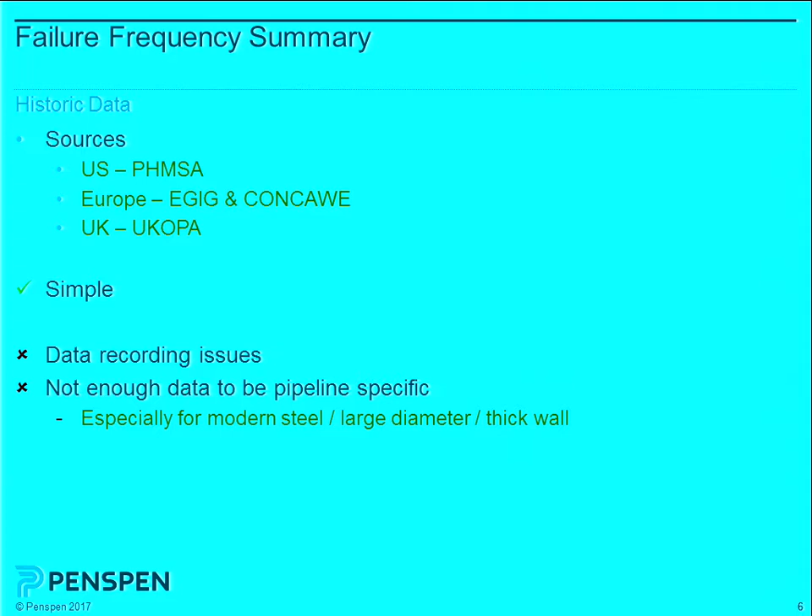Failure frequency: we've got historic data we can get from all sorts of databases. It's nice and simple, problems being not all the data is recorded, and if you want a specific value for a specific pipeline, good luck. Especially if you're looking at a new project. If you're in the design team of a new project and they want a risk assessment, when you go to the historic data, there will not be a pipeline that matches yours. And the answer then isn't that the failure frequency of your pipeline is going to be 0. If you're lucky, it'll be 0 on day 1.

Okay. But if we're not going to use historic data, we're going to predict. Luckily, UKOPA publish these summaries of the defect values that you can use. Incident rate, data from the UK. If you're somewhere that looks like the UK in the way it manages developments, i.e. not very much land and lots of people, so there are quite strict rules and you need permissions, then it works. If it's somewhere more like a banana republic, like America, where if you own the land you can do whatever you like, then you might want to think about probably getting more damage.

Failure: we talked last time about whether you've actually done these or not. Can't believe the pipeline engineering course doesn't cover these equations at some point. So NG-18 is for metal loss, so either corrosion or a pure gouge, and then the Hopkins-Cairns or the EPRG or the API 579 dent-gouge model, depending on which reference you pick up, but they're all the same model. Random variables: just use the defect dimensions, don't bother with the other stuff. You can do a full SRA if you want, it just takes longer. Need a bigger computer, and then you can solve it.

When I first started giving these lectures about 10 years ago, we used to recommend Monte Carlo simulation because this was hard. This is now a lot easier. Computers are better, so this is quite fast as well. If you do numerical integration, you get the same answer each time. If you do Monte Carlo simulation, you will trend to a stable answer, but you might need to do 10 million simulations to get there.

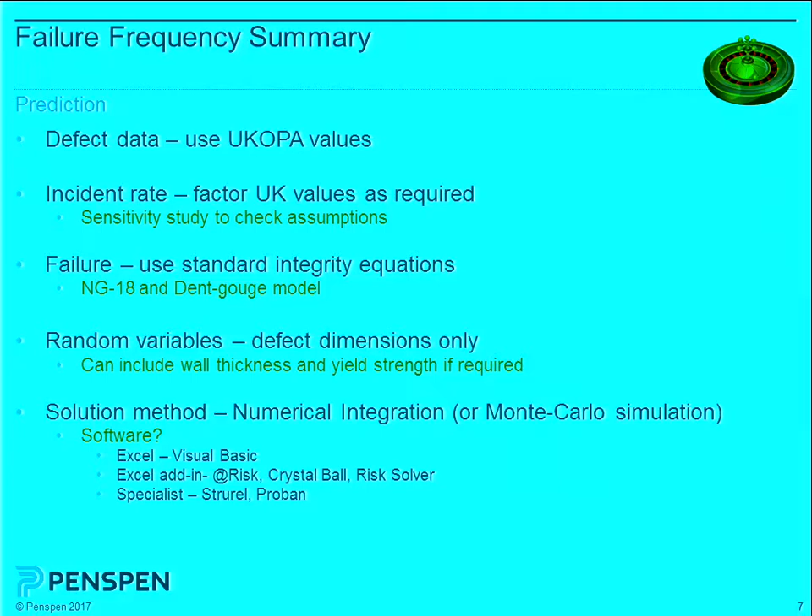So the more weird you get with these programs, the more all you're really doing is pushing pretty pictures for reports because nobody really believes it. Okay, so a little example. See if I can get this to work.

Okay, so we have here a little calculation, yeah? So we have a pipeline, yeah? 36 inch, 12.7, 75 bar, 5% underthickness. This is, from that upwards, the most common pipeline in the UK for the transmission system. The gas transmission system is pretty much mostly built to that standard.

Charpy energy, that's pretty low these days. You can get 300 joules now, but when these were built, that was the minimum in the API 5L spec. And when you're doing a risk assessment, most of the time you know very little about the actual pipeline. You haven't got the original material data, so we have a tendency to use the minimum value that was applicable at the time. The equations actually don't vary that much for Charpy, it's not that sensitive.

Area classification, so we're going to put something in. We've got depth of cover, standard UK depth of cover 1.1, no protection, and what we're going to get out is some things. So we've got some modification factors, so local modifier, this is just so we can fudge it, if we're doing it somewhere that's not the UK. Depth, 1.1 metres, so that's normalised to 1. Protection, there's no protection, so again it's normalised. When we put the area in, we get a value.

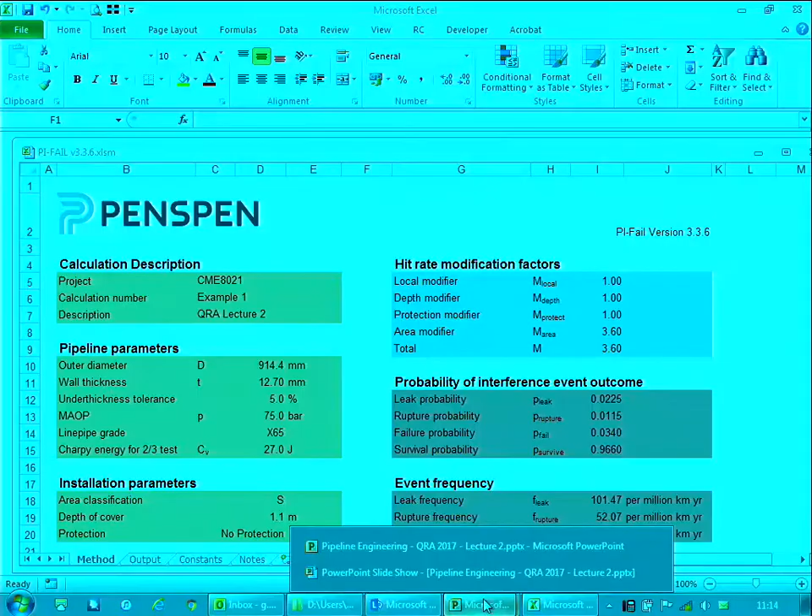And you get these results. So these, for the UK, we would use these in QRAs for the UK. If this was America, I might say, if this was a class 3, maybe we'll get twice as much damage because there's less planning permission. And once you own the land, you've kind of got a lot more freedom to do things.

Although they tend to now have a lot more one-call systems. So in theory, if you ring, you should get a response that says, no, don't dig there, there is a pipeline in that field. There are some one-call systems in the UK, but they don't cover everybody. Which then starts you to worry about whether it's better to have one or not, because does it give the construction contractor a false sense of security? If he rings the one-call system that exists in the UK and they say that it's fine, but it only covers 80% of the operators, well, what if you're in a field that's...

But hopefully the reason for coming on this course is you get to be the person who supervises the excavations, not the person who's doing the excavation. So anytime anyone digs a hole, stand back, just in case. It's always my advice.

Okay, so consequence assessment. So some simple models, quick rules of thumb, good for semi-quantitative risk assessment. We talked a little about the potential impact radius in the B31.8S equation, which is used in American legislation to define a high consequence area, which I call the big circle of death. It's a nice, simple way. But for a full QRA, I must update the clip art. Nobody has a computer that looks like that anymore. You've got complex models, you need to run them lots of times, you get a range of results if you use the literature.

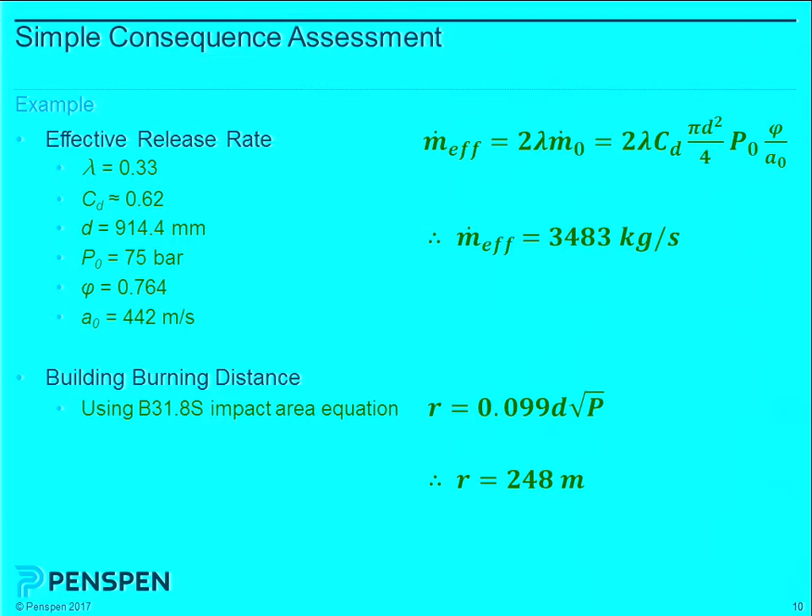Building burning distance from the B31.8S. So for that pipeline, when we're talking about 36-inch, 75 bar, we're talking 250 meters from the pipeline. If there was an ignited rupture, we would expect buildings to burn just from the radiation 250 meters away. Again, this is a very simple equation, so I probably should have rounded this to 250; 248 is probably too exact. Occasionally I see people answer this to about 10 decimal places; it's not really going to be that good. But that would be 250 meters just from the radiation. Obviously, if you've got wind blowing, you get fire spread from building to building, like with San Bruno in San Francisco.

Okay, so we look at this. Another simple one for radiation. So if we take that effective release rate, we would get this radiation with distance. And if you remember, 1 kilowatt per meter squared is kind of strong sunlight. So 1 kilowatt per meter squared is the kind of day in Newcastle that has people fainting on the streets from the heat. People have to take their coat off. So if you're starting at 1600, that's pretty hot. So if you were at that 400 meters, well, you're probably not even going to feel it.

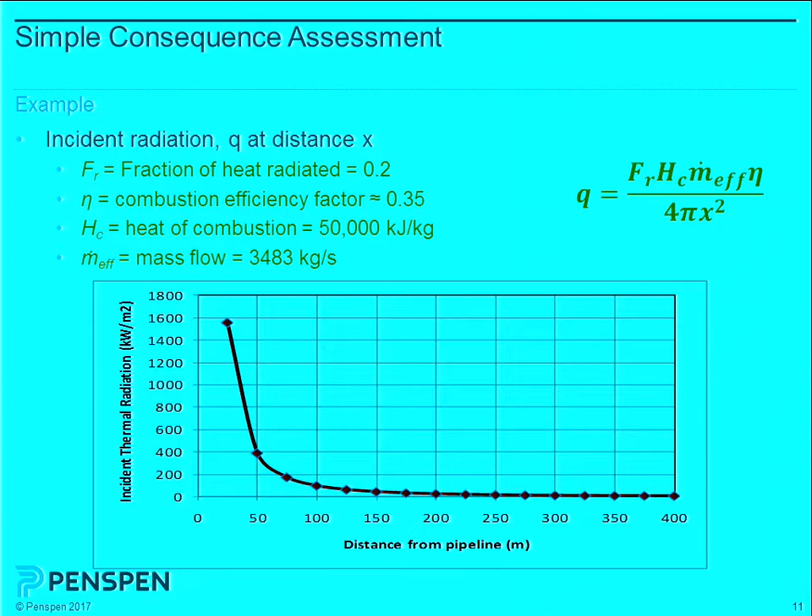Okay, so that was the lecture from 2 weeks ago. On to today. Risk calculation. We're going to talk about something called interaction length, and then individual and societal risk, and we're going to talk about risk acceptability. Concepts, how we make decisions. Surprisingly, some people are good at making decisions, some people are bad at making decisions. Organisations, on the whole, are shit at making decisions. And your company systems, what ALARP, as low as reasonably practicable, is. Talk about that, and a little bit about regulatory style, which usually just gives me an excuse to have another dig at Americans.

Okay, remember this? Yeah. Done this bit, identify the hazards, hazard identification, we know what they are for pipelines. Since the Canadians came up with SCC in the 60s, nobody's invented any new way to kill a pipeline. So you've got all the usual stuff. Frequency, consequences, and now we're on to the mathsy bit.

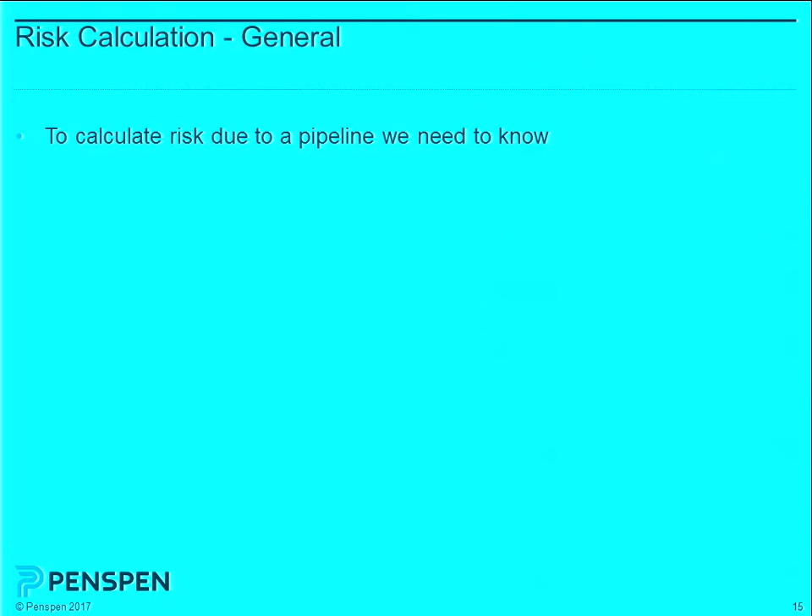So, if you want to calculate risk due to a pipeline, the risk from the pipeline to the people that are nearby, you need to know, is it a leak or a rupture? Because I'm only really interested in the dead people, I concentrate mainly on this for gas lines. A leak in a gas line, if it's natural gas, is not that big a deal. It is at low pressure, but not so bad at transmission pressures. If it's H2S, if you're in Kazakhstan, then these are bad because you might not know it's leaking and you've got the ability to kill people with a small leak.

Whereas even the most unsophisticated pipeline company can usually spot when their pipeline's had a rupture, because they suddenly get no flow at the far end. Things start looking backwards in the control room. Everything starts running towards a point in the middle. We also need to know how often it's going to fail. What's the frequency of failure?

We need to then know about the consequences. Are we going to model them varying with time, or are we just going to make a steady state assumption? For a leak, a steady state assumption is probably reasonable. Maybe not for a rupture, but if you were doing a simplistic or first pass count, you might take that as an effective release rate.

Location of the failure. Does it matter if the pipeline fails in the middle of the desert? It matters in terms of cash flow, in terms of money, you might have to compensate for the odd camel, but you're unlikely to kill lots of people. So if you've got a big network where some of it runs in the centre of cities and some of it runs in remote areas, having your failures in the remote areas looks like a good deal.

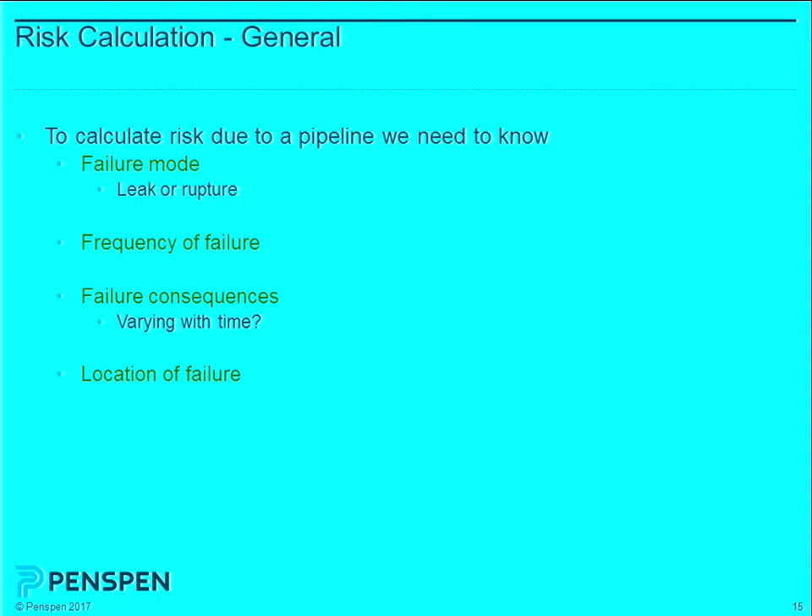How many people are there? This is the same point. How many people are going to be around the place that you're interested in? How much time do they spend indoors and outdoors? When we're doing assessments in the UK, we assume that in the daytime, 90% of the time is indoors, because the weather's miserable. In other parts of the world, it's the other way around. People spend all their time living outside because it's lovely. So when I do an assessment, I'm thinking, is this somewhere I'd go on holiday? Yes? Maybe they'd be spending more time outdoors.

And then, how much shelter is there? If you're the only house near the pipeline, and you're within that big circle where the building's going to burn down, when your house burns down, where are you going to go next? Whereas in an urban area, you jump over the garden fence, go into the next house, wait another 2 minutes until it starts to burn, and then into the next building. So in urban areas, people escape even from inside the building burning distance. In rural areas, people are casualties outside the building burning distance.

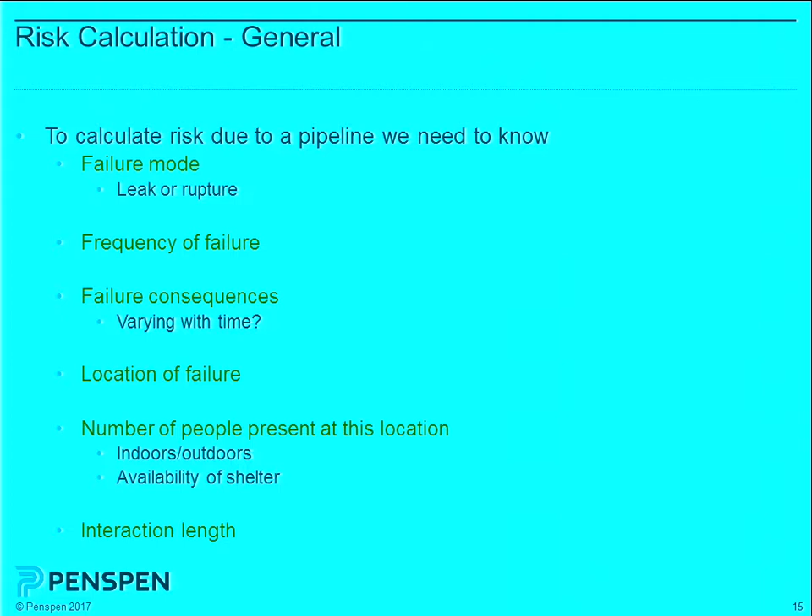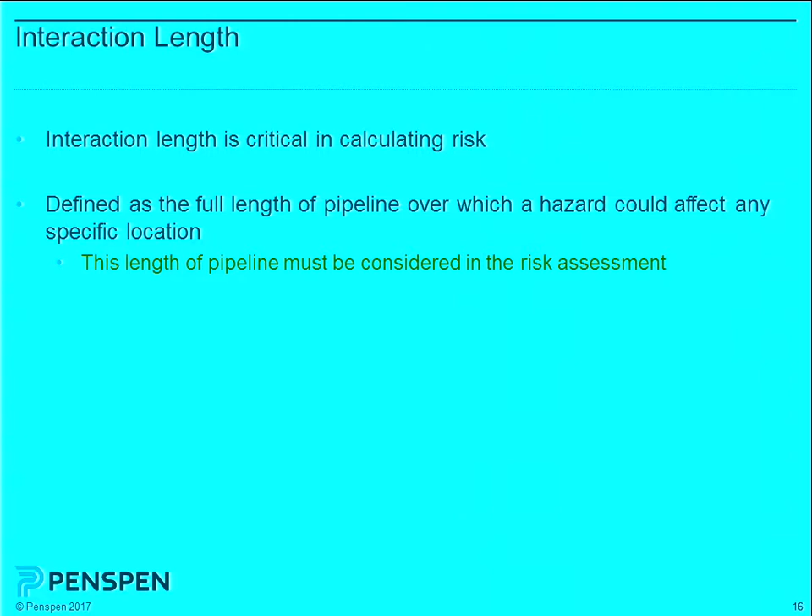And there's this concept called interaction length, which I think the next slide explains in more detail. What we really mean is the full length of the pipeline over which a hazard could affect any specific location. I brought some pens this time. So if your pipeline is running here, and you live here, this is why I became an engineer, not an artist, then if it fails here, if we've got a big fire here, does it affect you? No, so really we're looking at the bit where if there is a failure in that length, you will be affected. And obviously that depends on how big the pipeline is and the pressure, how big the fire is going to be, and where you are.

So yeah, much easier. So very simple. If we've got this concept called a hazard distance, and this might be the escape distance if you were outside, or the building burning distance.

But if we've got this hazard distance, which we're leaving slightly undefined, and you're stood on the pipeline, then obviously anywhere between those two fires, if the pipeline fails while you're there, you're going to be in hazard. And then a little bit of trigonometry. If you move further away, then you get like this.

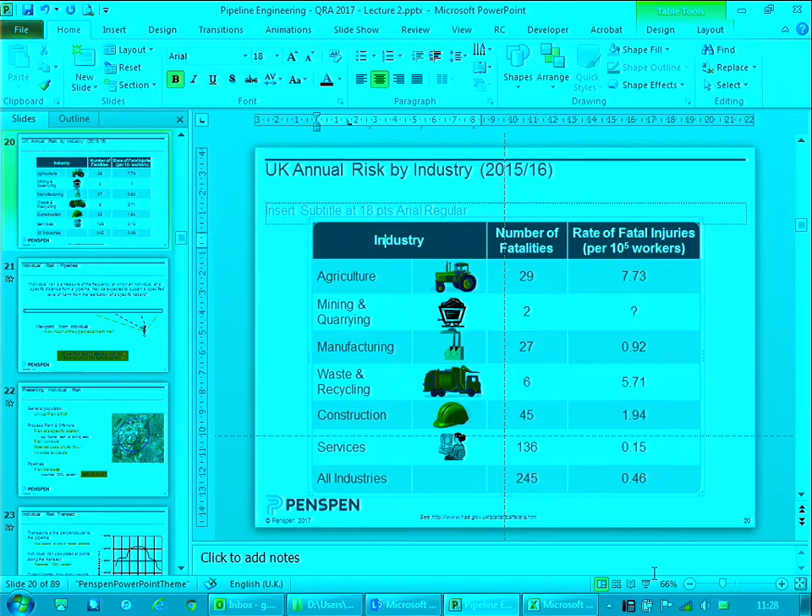Sorry, may I ask a question regarding the statistics? Regarding government statistics, do they sell these statistics? Well, in the UK, they give them away for free. You can get it off the HSE database. Because for doing these statistics, you need people. Yeah, no. Well, the government in the UK, the Government Statistics Office provides this data.

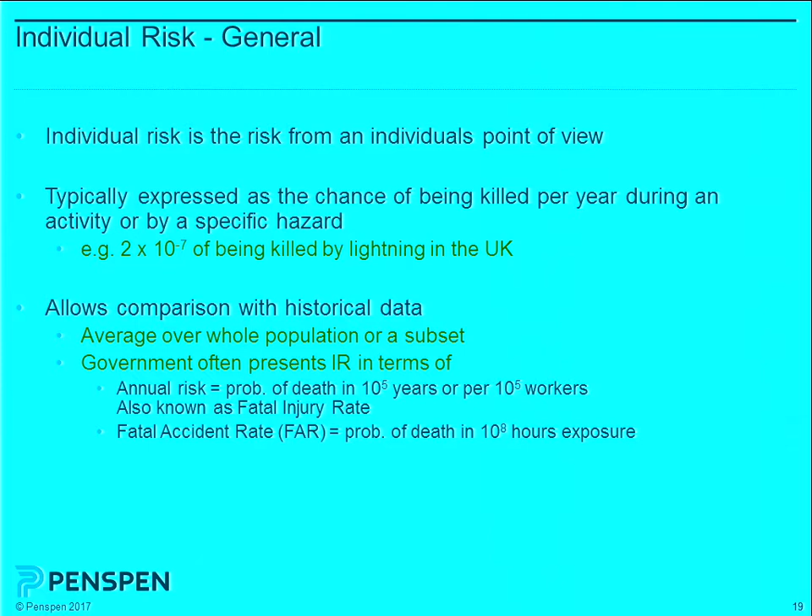For workplace deaths, it's very good because there's various bits of legislation that say if you kill someone at work, you have to report it. So they have very good statistics on that. I don't know if you can read that right now, in tiny letters. hse.gov.uk/statistics/fatals. Every year they produce a report of fatal accidents in the workplace.

They gave a number of fatalities in mining and quarrying, which includes offshore oil and gas extraction as well. These categories are all driven by EU categories. If you get the real report, there's a code letter that applies to each one, so you can then look up the Eurostat statistics as well and match them. For some reason, they knew how many people had died, but they didn't know how many people worked in the industry, so they couldn't get the rate.

So, this is the UK. 136 people killed. So the worst industry is the service industry, yeah? But the rate is the smallest because pretty much everybody in the UK works there. This is what we do now. We don't tend to do these other things very much. We stopped making things. We outsourced all that. So now everybody works in an office, and death by paper cuts is pretty hard to come by.

But still, 136 people in the office. Who knows what happened? Fell down the stairs. Just had a heart attack at work, might be counted as well. So the worst one, rate of fatal injury, farming, agriculture. Anybody know why? You know how most farmers die? The most common cause for farming deaths?

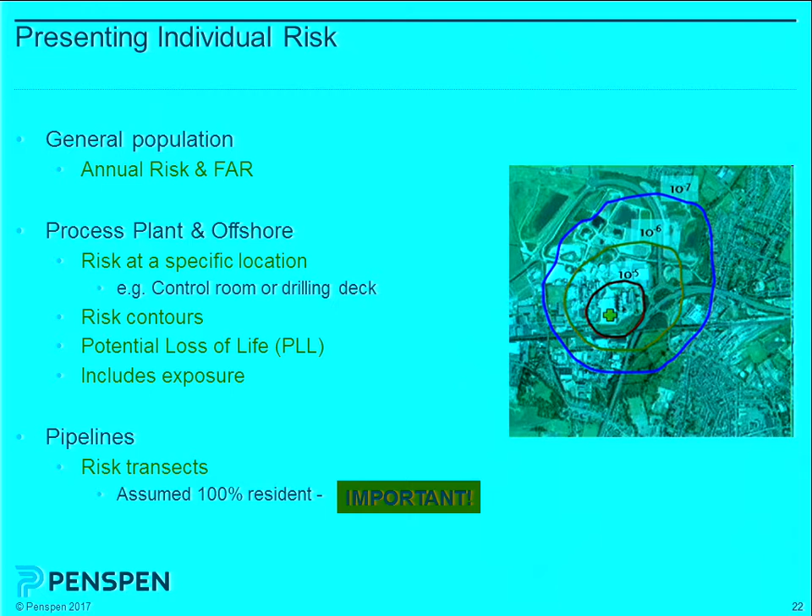But for pipelines, we use something called a risk transect, and we tend to assume that there is somebody always there. Yeah. Now there isn't normally somebody always there, but we can't prove there won't be because the pipeline's running through public land. Yeah? So if we agree with the regulator, we just assess it on the basis that there was somebody always there, so we can compare one pipeline with another. Yeah, it's really important. It's a big difference. So when you see individual risk given for process plants and offshore, it tends to include the exposure, how often each person spends in different places. For pipelines, we just assume somebody's sat there the whole time.

Okay. So a transect is just a line perpendicular to something else. So we mean a transect perpendicular to the pipeline. If we know that we can cause casualties at 500 meters, then we've got to have a transect that's at least 500 meters from the pipeline. Yeah? Get to that bit where you're at the edge of the circle. Calculate it along points on the transect for a theoretical 100% resident. It doesn't matter how many people are actually at each point, or if there's no one there at all. And you get something that looks a bit like this.

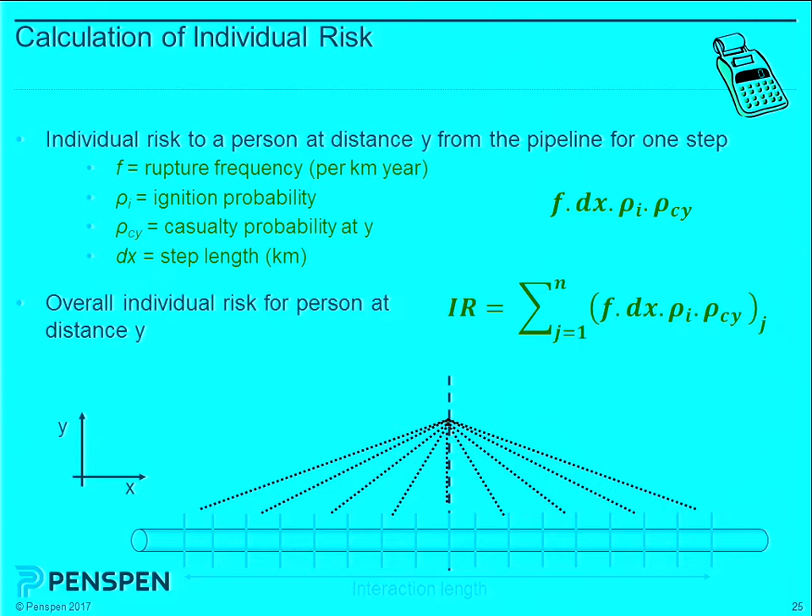So this last one's a bit more difficult to do, but the rest of it's fairly simple. There's just potentially a lot of them to come up with a risk transect. Okay, and obviously, mathematically, what you get is that it's the sum between 1 to n. Okay, so I think if we're lucky, we get an example next. Okay, all right. No, this is the same point I'm trying to make here.

You're going to repeat each failure type. Well, maybe we think about doing leaks and ruptures. If I was going to skip anything, I think we'll ignore the leak. People should be able to run away from the leak. But you've got all these various bits, so you've got potentially lots of those in the calculation.

But this might be a casualty probability curve with distance from the pipeline. Again, it's going to be flat to begin with because you're going to be so dead, and then it tails off. And you come to a point where you're guaranteed not to be a casualty. You will be safe if you were at this point.

But it's normally relatively low for pipelines, and therefore it's not a very good decision-making tool. Most pipelines come out with very similar individual risk levels, regardless of how good or bad they are. So 1 times 10 to the minus 6, 1 in a million, is the HSE's broadly acceptable level.

We'll see that later on. But below that, you're not bothered, and most pipelines tend to be around 1 or 2 times 10 to the minus 6. So they're all just into the tolerable if ALARP region. So on the whole, we calculate individual risk. We tend not to make our decisions on individual risk.

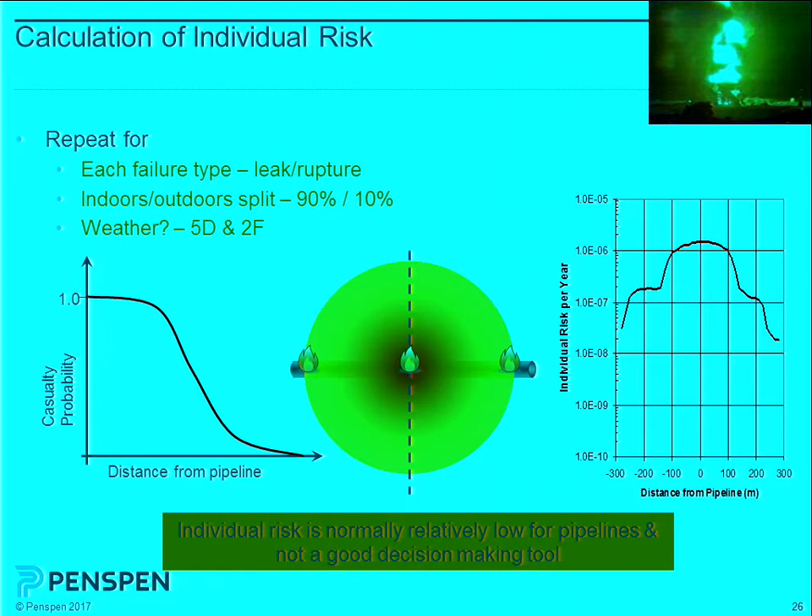Okay, a little example. If we had a rupture failure frequency of 150 per million kilometre years, and if you remember the little example I did of the big 36-inch 12.7, we've got 14. So we're probably talking about a slightly thinner pipeline, or somewhere where there's much less control over development. Ignition probability, let's say a third, 0.3, arbitrarily chosen because it multiplies by 150 quite well.

And let's say we're going to have a very simple approximation for this casualty probability. In reality, we're going to get something that looks like this S-curve, and we're just going to have a two-step bit here. We're going to say the probability of being a casualty is 1 between the pipeline and the building burning distance. So if you're inside the building burning distance, there's no escape. You will be a casualty, which is back to the old B31.8 big circle of death approach.

And then after that, well, it kind of depends on the amount of shelter, but we're going to say there's a 25% chance between the building burning distance and the escape distance that you're going to be a casualty. And we're going to assume that 90% of the time is spent indoors and 10% outdoors. So this is somewhere in Northern Europe.

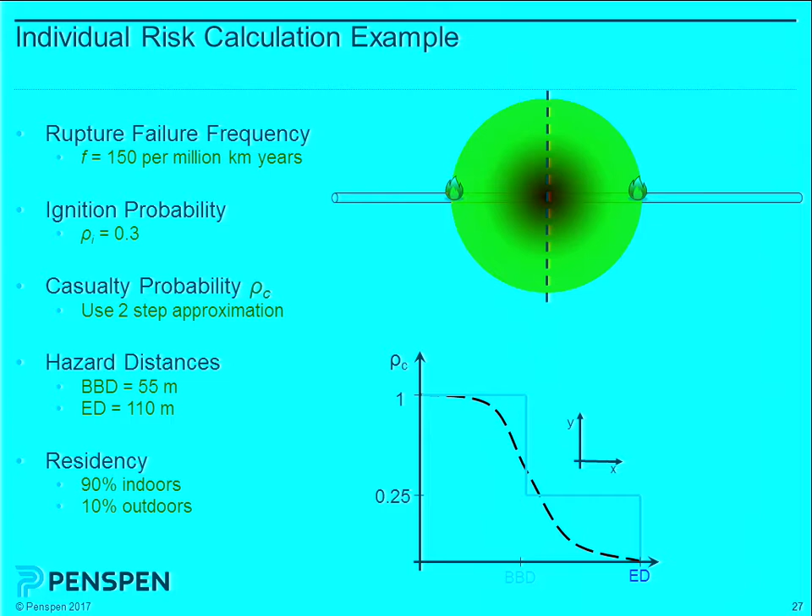But if you're going to do it by computer, you could say, okay, I wonder what would happen, say this was the biggest heat wave Newcastle has ever seen, everybody spends all their time sunbathing outside. Problem is, when would the pipeline fail? Would it fail in the summer or in the winter? What's the pressure likely to be in the summer compared to the winter? You start getting into all of those. We tend to average it all out.

Okay, just a little summary. So, between 0 and 55 metres, indoors and outdoors, your casualty probability is 1, yeah? So, if you're within 55 metres of the pipeline, you're dead. Sorry. Between 55 and 110 metres, if you're indoors, you're fine. Stay indoors, don't go to the window. Outside, you've got a 25% chance of not making it back indoors. You were too far away from the house, so you were toast before you got back home. So you've got 25% of dying, sort of thing.

And it will be the slow and people who are sensitive to radiation. So this is going to be like old ginger people. Sorry, it's 25% of dying. So 25% chance of being a casualty. So 75% of you get away. So all you young guys who can run fast, you'll be fine. This will be like some Scottish grandpa, really pale skin, very sensitive to radiation, and can't run very fast. Once you're beyond 110 metres, then you can just sit and watch your neighbours burn.

Yeah, it's the guy with a broken leg. Yeah, exactly. So, you guys have got to decide. You make your own decisions. Do you go back and pick him up? You can.

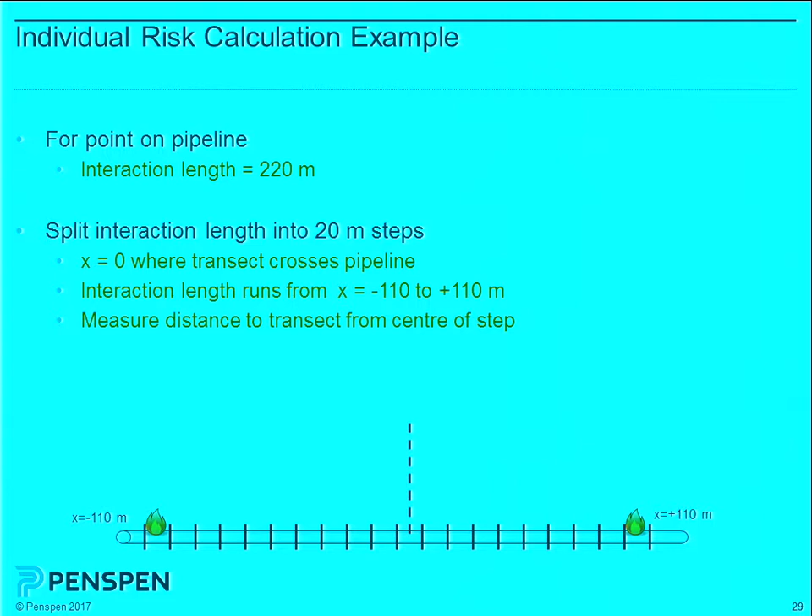So the step goes from -110 to -90. The midpoint is at -100. So if you're doing it by hand, make the maths easy. Don't pick bizarre things that mean you've got to do more sums than you need to. Move the fire down the pipeline step by step. So we've got our little equation for individual risk, very simple. So for y equals 0 and x equals -100, this is the point.

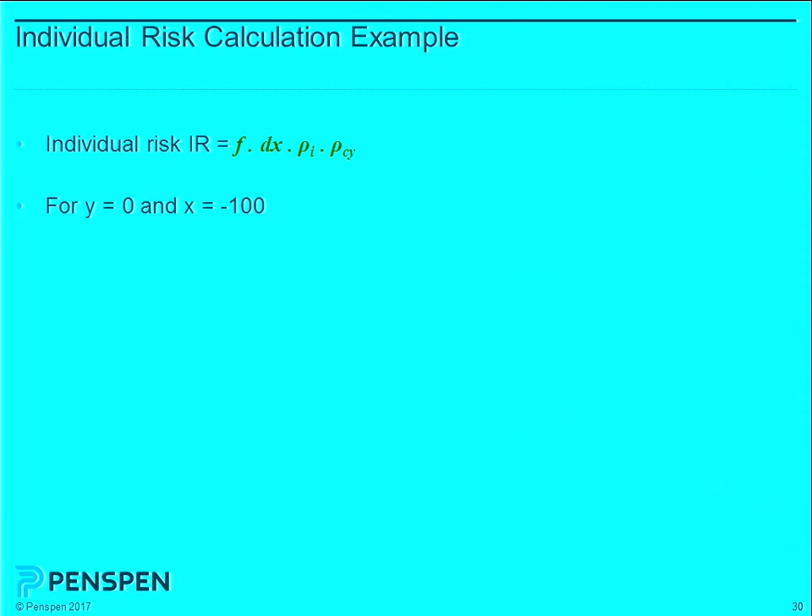This is our pipeline here, and we've got our transect. We want to calculate the risk there. So at this point is x equals 0, and we're looking at the point at -100. So y equals 0, x equals -100.

So for person indoors, we've got our failure frequency, 150 times 10 to the -6, 150 per million years. Our step length, 20 metres. This is in kilometre years. Your step length tends to be metres. Make sure you do that right. So 0.02. Ignition probability 0.3.

But we're talking about a person indoors. If you remember back to that little table, indoors, you were only a casualty if you were within 55 metres. So 0 per year. Fine. Outdoors, the same thing, except your casualty probability is 0.25. So there's a small chance you will be a casualty. But of course, 90% of the time is indoors, only 10% is outdoors because this is rainy Britain. So we can't go out in case we melt in the rain. So actually, the risk for that one step.

So we're only talking about this one step here so far, we've calculated that value. We're going to have to do the same for all the other steps to get the risk here. We get the individual risk of the step is 2.25 times 10 to the minus 8. Is this clear? I know I'm rushing. There's quite a lot to get through. You can email me later if you've got any questions, if you read it through and it just doesn't make any sense.

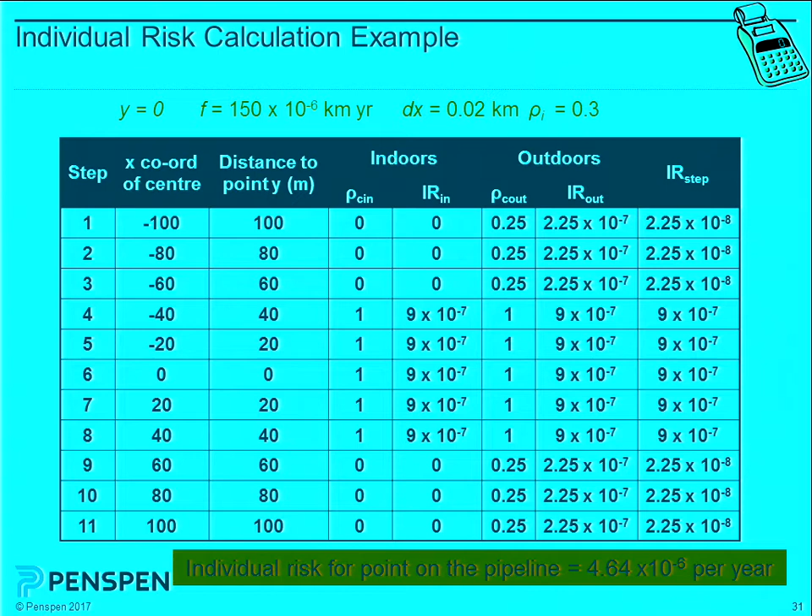You heard the old joke about the Irish guy who heard that 90% of all accidents occur within 5 miles of home, so he moved house. Very, very old joke, and very bad.

We're just assuming the down side is the same. If you did down, it would be reflected the same. It's the same on either side because we've not introduced anything that says differently. We could make it really sophisticated. We could say on the north side of the pipeline, it's all people who hate being outdoors, so they spend 100% of their time in the house. And on the south side are people who've got big gardens, so they spend much more time outside. Then you would have slightly different answers on both sides. But for a little hand calc, just take the average.

Again, when we do it for real, we put areas in and we give values to those areas of different shelter, density, different other parameters that influence the calculation. But we do that through a computer program. If I was doing it by hand, I would think, okay, what's going to be the average for this site as a whole?

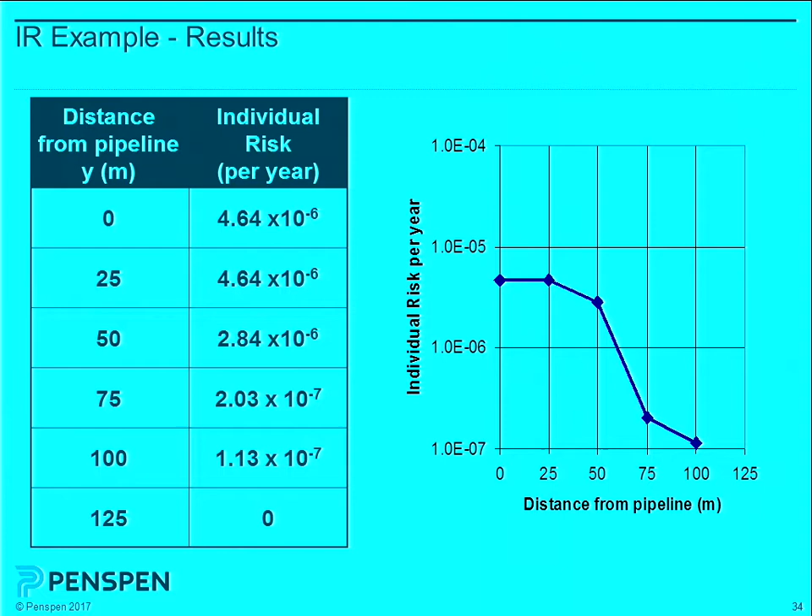We've done this every 25 metres. If instead we did it every 10 metres, we get a slightly more refined case, and now we do have a point at 110, which is our last point, whereas before, our curve stopped at 100. And you see here it was flat there, and then it started dropping because we've actually got flat 30 metres. If we went to 5 metres, you might get a slightly different answer, but the peak should be the same.

Again, you can see the two shoulders. So we've got the indoors and outdoors, and just outdoors, because we said this 90%, 10%. So 100% of people can be affected here, only 10% here. This is like an order of magnitude. So as a quick cross-check, you can think, does it make sense? These points are about a factor of 10 apart. That's about right, because this is everybody who's inside and outside, and this is only people who are outside.

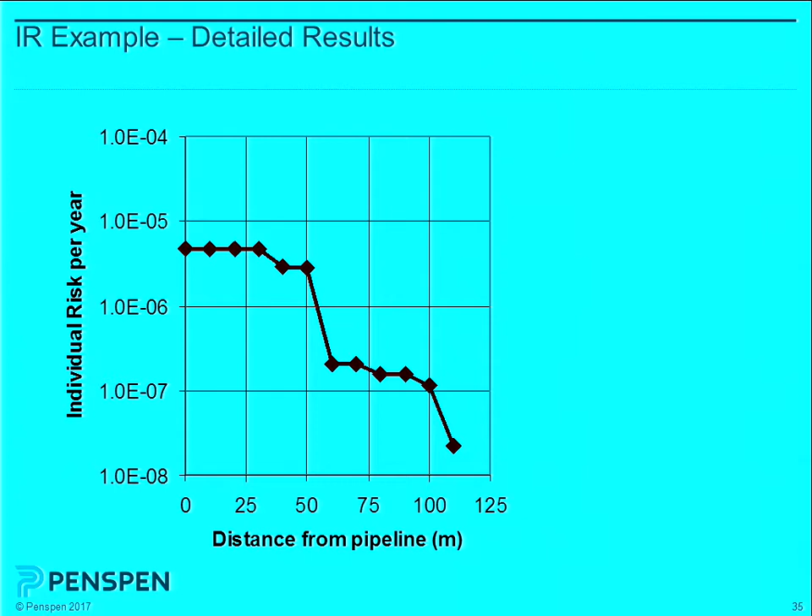Yeah. It shows the effect of indoor and outdoor casualty probability. If you see an individual risk transect that's just like a big upside-down bowl, a nice smooth curve, it means they ignored the difference between indoors and outdoors. And, if I was being critical, I would probably say to somebody that's a bit crude. You've ignored one of the big key factors.

Have you either assumed everybody's outside, there's no shelter at all, or have you assumed everybody's inside, nobody ever spends any time outside? Either way, you're not really representing what's really happening. So if you see an individual risk transect for a pipeline, you want to see some little shoulder. There's got to be some effect.

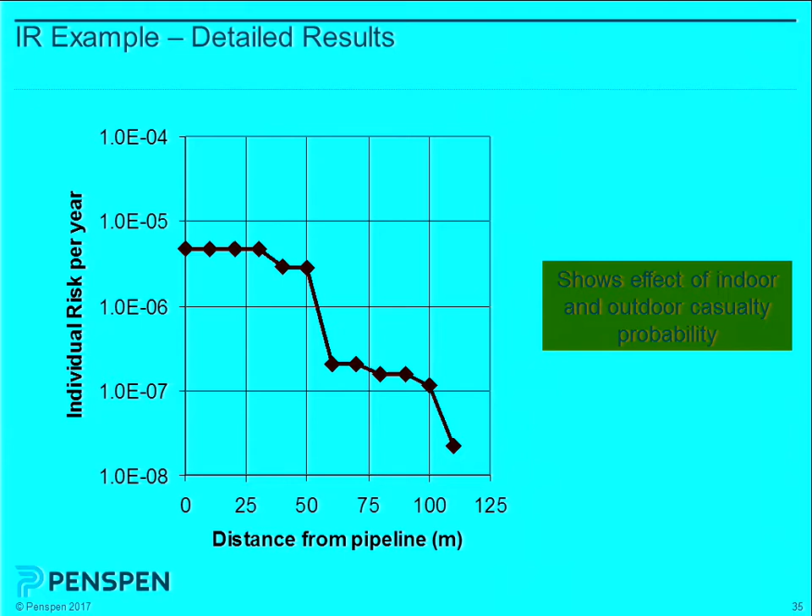So that was individual risk. Let's talk about societal risk now. More calculations, similar but slightly different. So, the societal risk is a risk from society's point of view, in theory. And there's much more societal concern over large incidents, yeah?

So, it's totally acceptable that people die in road accidents all the time. Some countries are better than others at their road accident statistics, but everywhere you go, it tends not to be a big issue that there are traffic deaths. I don't know, maybe in India, where the traffic's terrible. But I don't know if that's causing a problem. Eventually people say there's too many people dying on the road, we ought to do something about it.

But on the whole, that's the level of risk you accept because everyone wants to drive, and 70% of people think they're an above average driver, these kind of things. But as soon as you have a train or a plane accident, that causes a lot more concern. Yeah. So, even if you take the local news, if you watch Look North,

it's only the first item on the news if it's been a big car crash with lots of vehicles. If it's just one vehicle and it's a slow day, they might put it at the end just before the video of the cats or something. But if there was a train or a plane crash, that would be the first item on the news, and probably on the national news, not just the local news.

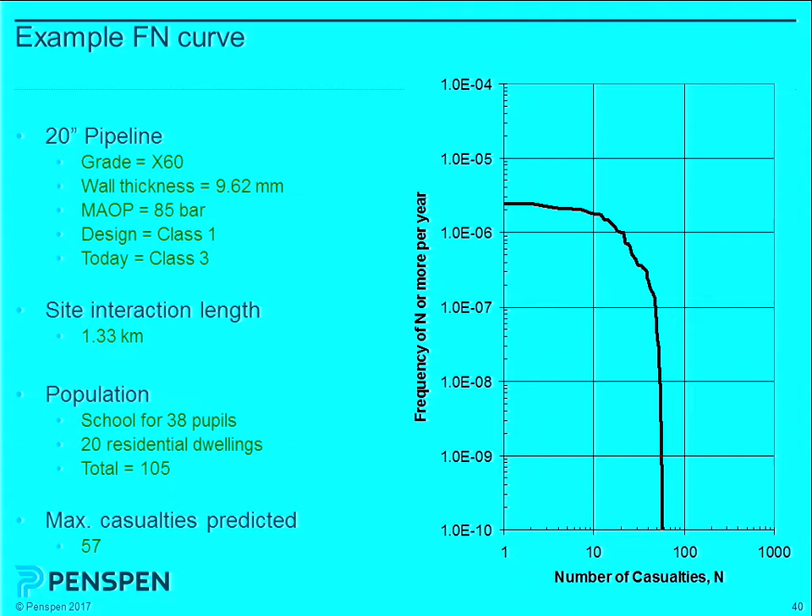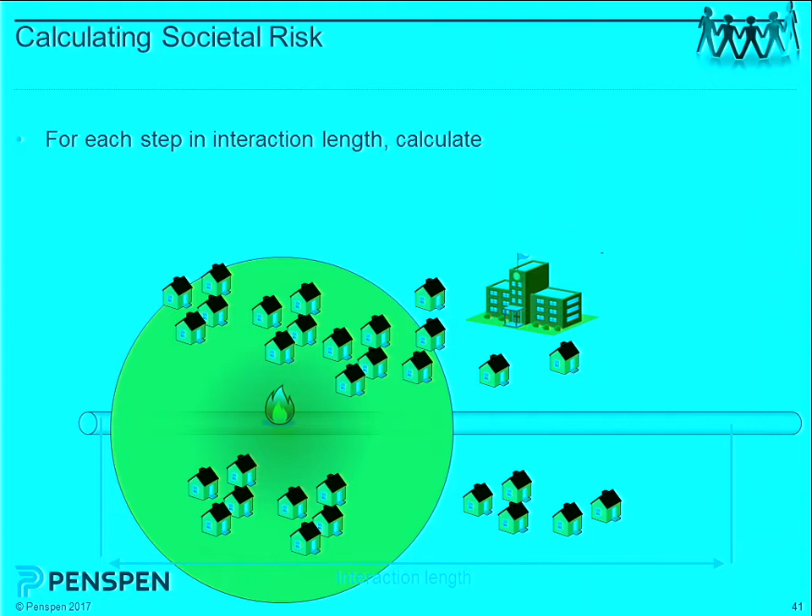So how do we work out societal risk? We've got our interaction length. We can work out our big circle of where buildings burn. We're going to split the interaction length into steps. For each step, we've got to work out what the frequency is, so it depends on the wall thickness, the depth of cover, all of those things, and the number of casualties. And we call these little f and little n, and this is an FN pair. So for each step in the interaction length, you get an FN pair.

And the frequency is the frequency of causing casualties, so the frequency has got to include the probability of ignition in it. So in individual risk terms, it would be the F term, the dx term for the length, and the rho I. So those bits go in the frequency, and the casualty probability goes in the number of casualties. So it's similar to the individual risk, but not quite the same.

So in such an area, how do you choose your data position? Where you're going to transect? Oh no, we're not doing a transect now, we're going to do an FN curve. So we're going to move the fire all the way along the interaction length. Now we're going to draw a picture that gives us an FN curve that represents the whole development.

What we would also do is do the individual risk, and what we'd probably do is pick where we think it's going to be highest, or through a representative area. So we may just say, oh, here will do. Draw a line there, that gives us the individual risk that's typical for this area.

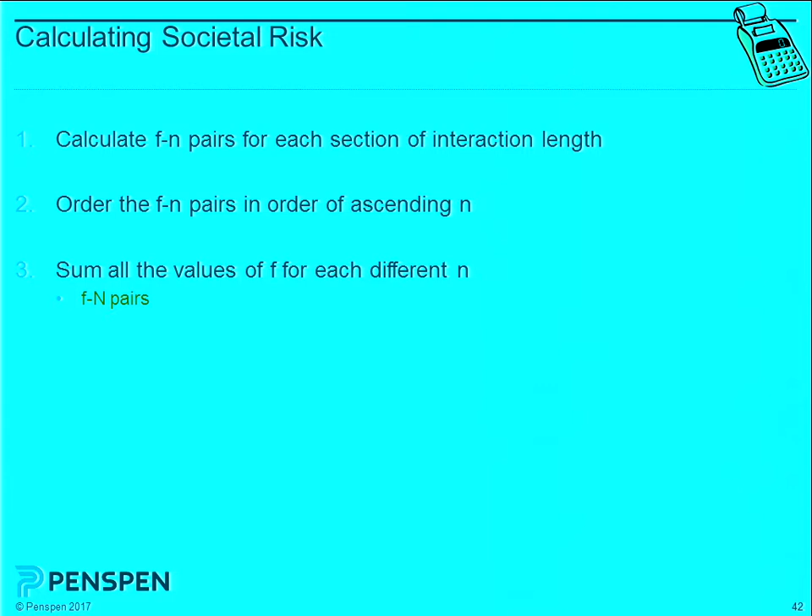And then we're going to sum all the values of f for each different n. So if we have 5 sections where we can kill 5 people, that adds up to the frequency of killing 5 people, which is what we want. And then we do this cumulative sum because it's n or more. So this doesn't make half as much sense as individual risk, but this is just the way it is. This is how you get to the FN curve.

And then you plot it as a curve. It's only 5 steps. Not that hard to do, but just again a little bit of manipulation. And we've got a little example here. New development near the pipeline, 8 dwellings, 5 people per dwelling, certainly over the top for the UK. UK pipeline codes suggest you can take 3 as an average per house, or you can use census data.

We've got a small office building with 50 people in, and assume that everyone's there. We're just going to make it simple. No day and night, no moving. Just assume it's the same. So no one gets to go home from work. So this is the Penspen office.

No one gets home. No. So actually, I think I was the last person to leave the office last night, having printed these notes out, and that was about 8 o'clock. So we get to go home eventually.

Okay, so we had a layout like this, 8 dwellings, 1, 2, 3, 4, 5, 6, 7, 8, and a little office block. And we've got a nice little grid, a nice simple set of geometry. We've got these data, once again, chosen suspiciously so that they multiply through to nice round numbers. Failure frequency 40, ignition probability 0.25, hazard distance 100 metres.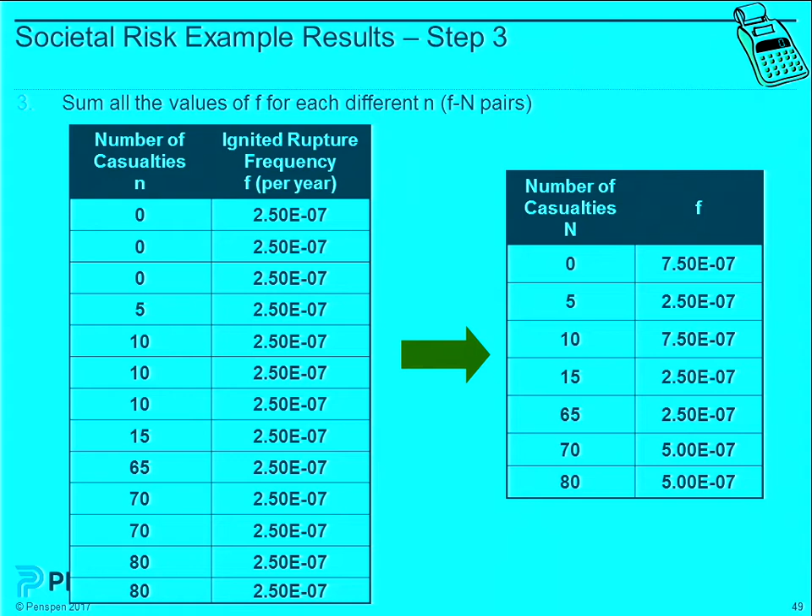Step 3, we sum all the values of the different FN pairs. So we've got three sections with 0, 1 with 5, 3 with 10. So what we end up with is something like this. Does that last step make sense? Almost there now. None of this is very difficult mathematics; it's just a little bit laborious.

Then we've got a cumulative sum. We start with 0, but we're going to drop the 0; we'll come back to that in a second. If we want the frequency of 5 or more casualties, at least 5, then it's the sum of all of this: 2.5 plus 7.5 plus 2.5, and so on, and you end up with 2.5 times 10⁻⁶.

The frequency of getting at least 10, 10 or more, is that minus this number, because you're then only adding these ones. And then you get to that one. And obviously the last point, 80, should be the same in both because there is no other data. Why did we drop the 0 point? There are 2 reasons.

Don't look ahead to see if I've written it down. You're on the next slide.

Shocking. Very shocking. Okay. One of the things is, remember when we looked at the interaction length and we said we're going to take the points of the last houses and just add the interaction length on, knowing that would give us some areas that would always be 0. It was a simplistic assumption. But we could have started another 100 metres away if we wanted to. So the amount of 0 is kind of a little bit arbitrary.

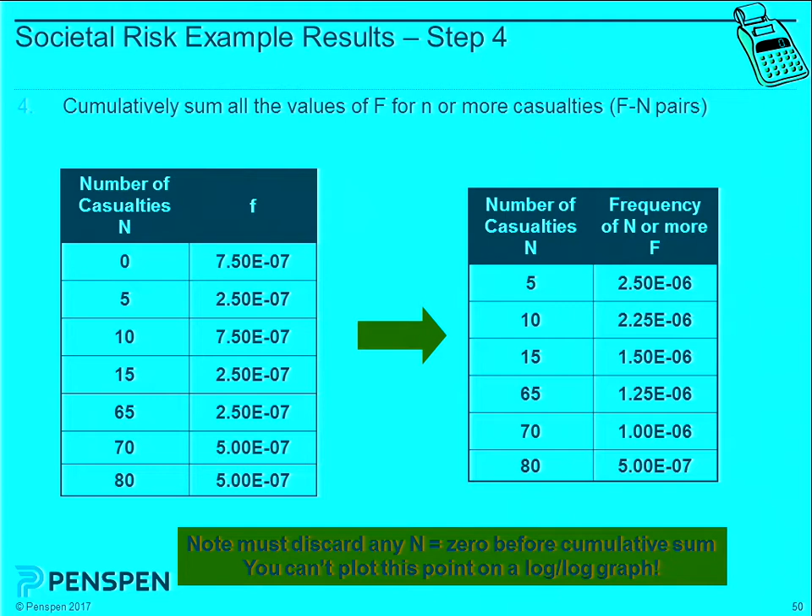And so what we get is this nice little table where f gets smaller as n gets bigger. You want it all to be going that way the whole way, monotonically decreasing in mathematical terms. And we get a plot that looks like that. Fantastic. Now we start at 1, the base of our graph is 1, and we haven't actually got a point because we didn't have one person on their own.

If we'd have defined the population better, or maybe during the day only the mother stays at home, let's be sexist about it, the man goes to work, the children go to school, or the other way around, but maybe there's only one person in the house in the daytime, and at night time there's 5, then you would have a point with 1 on.

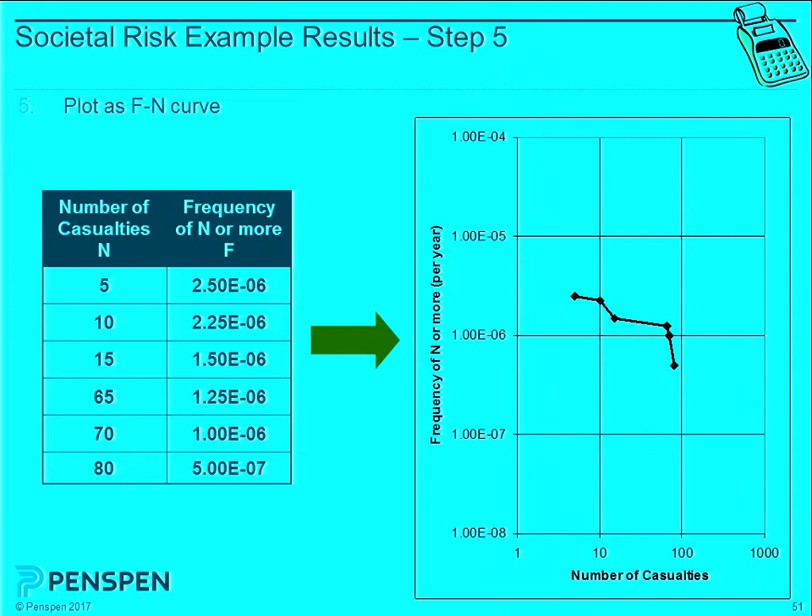But because this is the frequency of n or more, effectively it's the same as 5. It's flat at that point, because 1 or more is the same as 5 or more. Does that make any sense? We haven't predicted 1, but the frequency of getting 1 or more is the same as the frequency of getting 5 or more. So it's common practice just to draw a horizontal line back from your first point to 1.

The other bit is, of course, in reality, this could be a vertical line. It's like a cliff edge at this point, but we tend not to plot that. Again, another little simple calculation method that you could do by hand and maybe be asked to do by hand shortly. Enough of a clue.

So that and the individual risk calculation are 2 kind of hand calcs. And these are real calculations. We've simplified them; we do them much more complex in reality. We include depth of cover, different wall thicknesses, different grades. We plot the pipeline in the real geometry. We do all those things.

We look at different people's movements day and night. In fact, we probably look at a week as a whole and how everything varies over the week, split up maybe into 8 different time periods. So essentially we're doing the assessment 8 times and taking that all into account. If you were going to do it by hand, you'd just spend longer. You could do a reasonable, simple first pass by hand, not too bad, and by Excel really easily.

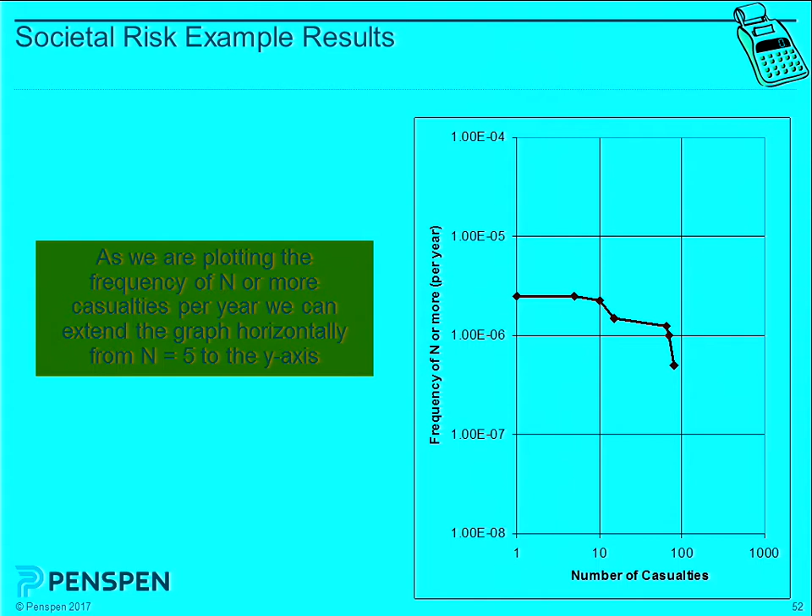If you counted the number of houses in the circle and put that into Excel, it's really easy then to do the formatting to get the FN plot, no problem. So, any questions on calculating societal risk? Read through the steps. Don't worry if it doesn't make any sense. It just is what somebody decided is how we were going to do it, and everyone has agreed that's how we're going to do it.

Alternative ways of presenting risk. So we talked about this before, potential loss of life. You get this a lot. If you read a safety case for an offshore platform, the potential loss of life will always be one of the headline figures. So it's a measure of the average number of fatalities per year. So you really hope it's less than 1.

If you ever have to work offshore and you get the chance to see the safety case before you go, if the number's more than 1, it's probably not a good environment to work in. We don't really want to predict you're definitely going to kill someone on average every year. It should be a low number. When it happens, it might be a lot of people at once, but you want it to happen not very often, so your average is small.

And it's the sum of the individual risk for the exposed population from various points on the site. So you get the individual risk at the drilling deck, times the number of people at the drilling deck, times the fact that they're only there for 12 hours a day. Number of people in the accommodation, heli deck, you can split them. Same with a process plant, you could have people working on plant A, plant B, control room, canteen, car park, work it all out, and then you end up with a potential loss of life.

Another thing that we get is called expectation value, and we use that a lot in cost-benefit analysis. And again, it's a statistical expression of the average number of fatalities per year. The way we do it is we sum these FN pairs before we've done the cumulative bit. If you sum the product of the FN pairs, then you get this thing called expectation value, and it's analogous to the potential loss of life. It's just done in a slightly different way. Under the right conditions, an expectation value like this, sum of F times N, is equal to IR times N.

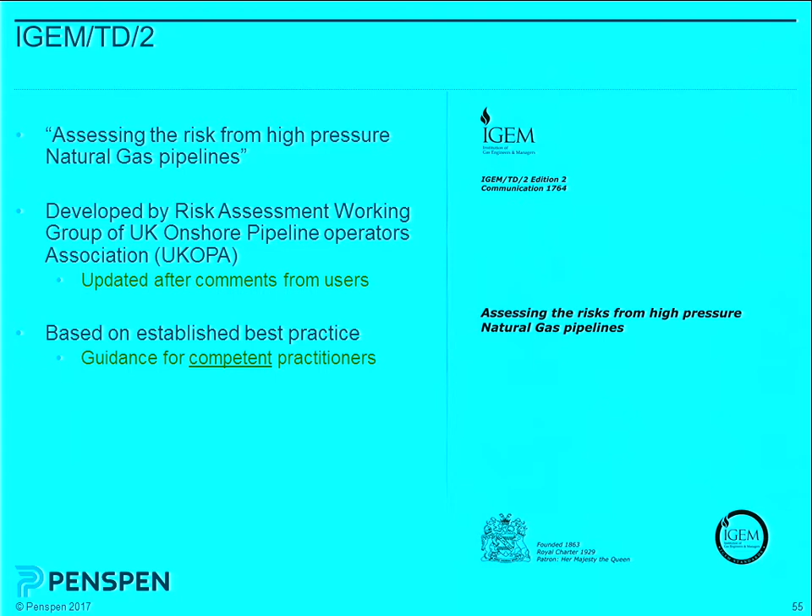Based on established best practice. So how did the industry calculate these things? What did they take into account? And therefore guidance for competent practitioners. And it's partly so we could move our discussion. We were discussing a lot of things with the regulators, and we wanted to talk about what was acceptable risk, not how to do the calculations.

We wanted to park this, just say, look, these are the methods and methodologies, the models, the assumptions we use. We're going to stick with these. If you stick with those, what's acceptable? How many people are we allowed to kill? Where do we draw the line? And that's what we wanted to start. We wanted to push the regulator.

And so for 20 years, we've been having discussions with the Health and Safety Executive. When I started this, I used to be the graduate engineer who took the minutes of these meetings, and now I'm the person hammering on the desk saying, for God's sake, we've been talking about the same thing for 20 years. So we wrote this as a way to say, once it's published as a standard, there's nothing they can do about it. They weren't happy. Tough shit. Now we get to talk to them about what's acceptable, because this has been parked to a certain extent.

So it's only applicable for natural gas. It's got some recommended event trees. Did we talk about event trees in the first lecture? I don't remember. It was a long time ago. And I've done my subsea lectures in between, so I'm kind of mixed up as to what course I'm delivering. And it talks about how to do failure frequency assessment.

So it has some historic operational data from the UK in tables. It has some generic failure frequency curves, which I think we might talk about in a minute. And then it says, if you're going to predict, you should include these things. It doesn't tell you how to do the predictions, it does give you some references, but it says, if you're going to do prediction, include these things.

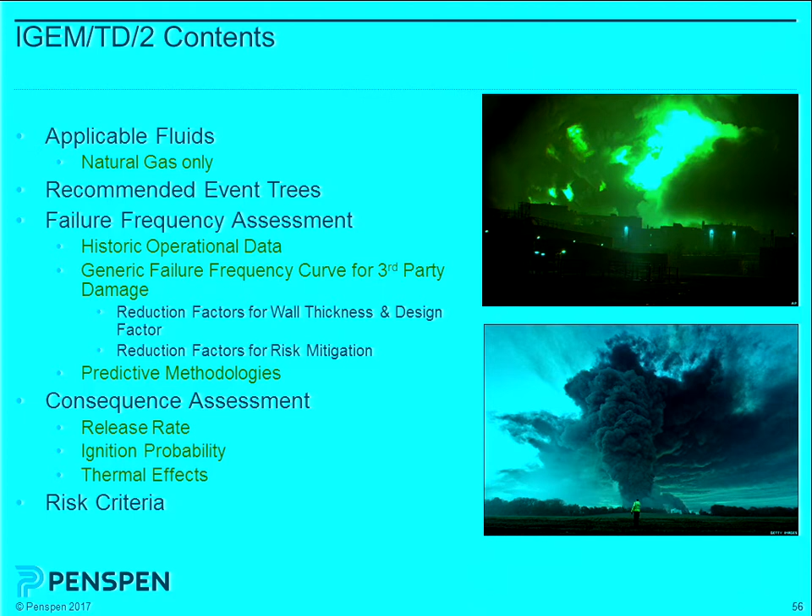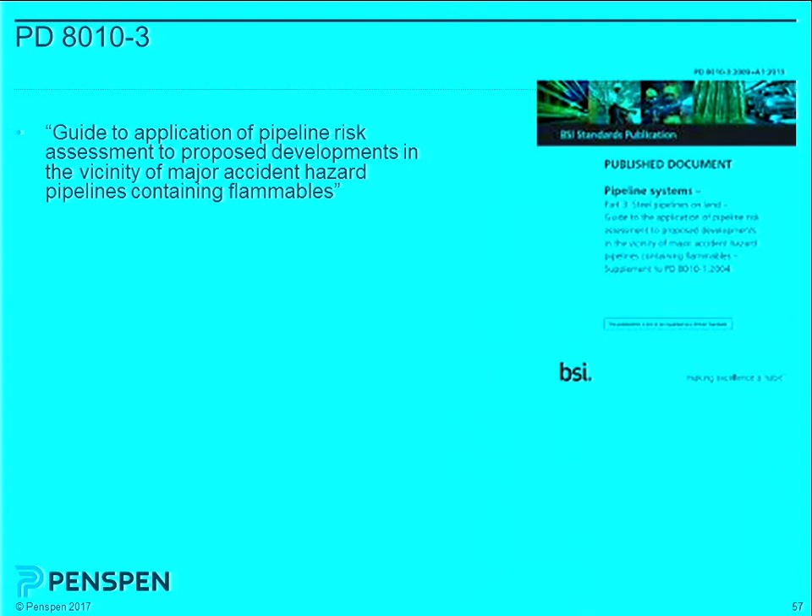Okay. There is an equivalent published document for non-methane pipelines. So PD8010, what used to be BS8010, British standard, now has to be overruled by European standards, so it's a published document. And it's got a much less snappy title. And there's a new version of that, written in parallel, so we wrote the two together. And it's got a much wider range. So it covers all the other things that a major accident hazard pipelines.

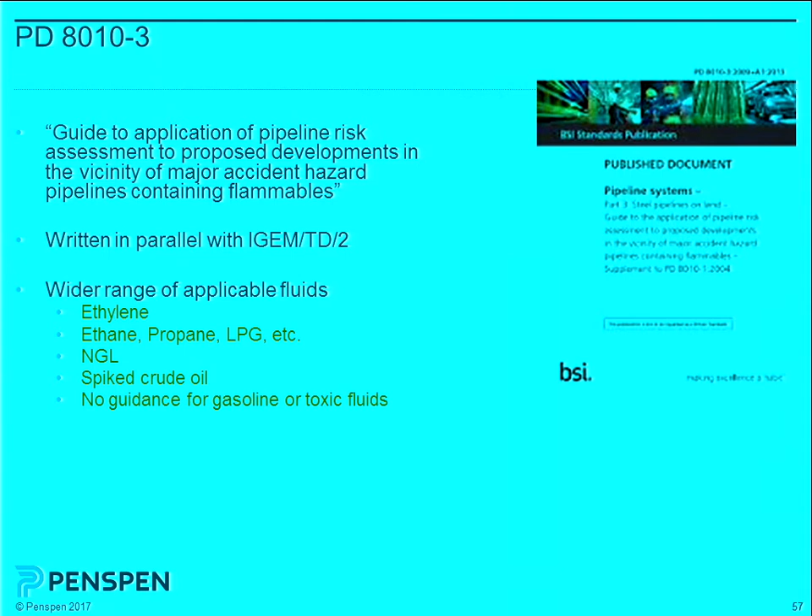Gasoline and toxic fluids are excluded. Toxic because it was too hard. Gasoline because in the UK legislation it's not actually defined as a major accident hazard pipeline. It's a little bone of contention with the HSE, but they got missed off in the first drafting of the legislation. And it's got slightly different risk criteria. I think there's another slide in a second that shows that.

But this one accounts for the fact you might get a drifting dense gas cloud from an LPG release. So your casualties may not be close to the pipeline. With a methane release, all your casualties have got to be within that 250 metres, say, you calculated from the pipeline. If you've got an LPG release, if it doesn't ignite locally and it goes wandering off down the valley, blown by the wind or slumping with gravity, then the casualties might be in the nearest town, not actually where the pipeline is. And the level of acceptable risk is different for both of them.

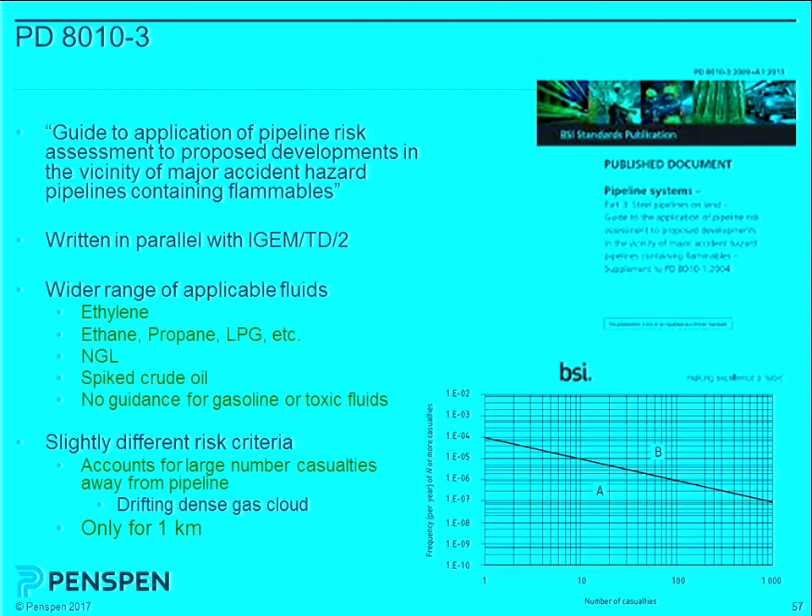So, quantitative risk assessment: it's an absolute measure of risk, which means it allows you to judge it against other everyday risks. It's meant to be objective. There are little bits of subjectivism, things like residency periods that you build in, but if you're writing a QRA report, you document all of that so somebody else can say, well, I don't agree with that, or repeat the analysis themselves.

But it needs specialist software, models, expertise, it's time consuming, and so we only tend to use it for specific areas. Location class change is the big one. Some land use planning applications, so somebody wants to build something near your pipeline, and then occasionally bits that you're just worried about. Might be because you're worried about the integrity. You're thinking, we know we've got an integrity problem there and we're not going to be able to fix it for the next 3 years.

So what risk level are we putting the people nearby on? You might just do that assessment yourself and say, okay, it's pretty high, we go back to management in the company, get the budget released early so we can fix the pipeline this year, not in 3 years' time. But if you're going to do a risk assessment of a whole pipeline, then you use qualitative or semi-quantitative methods.

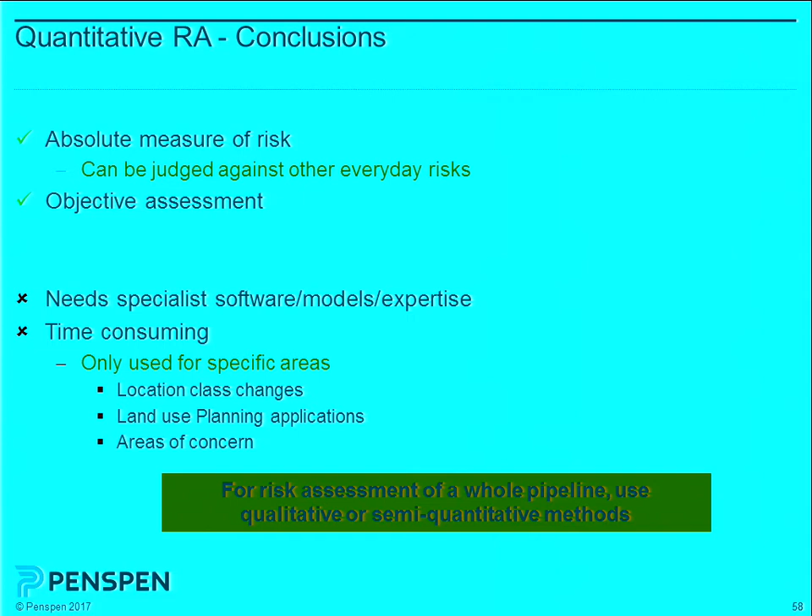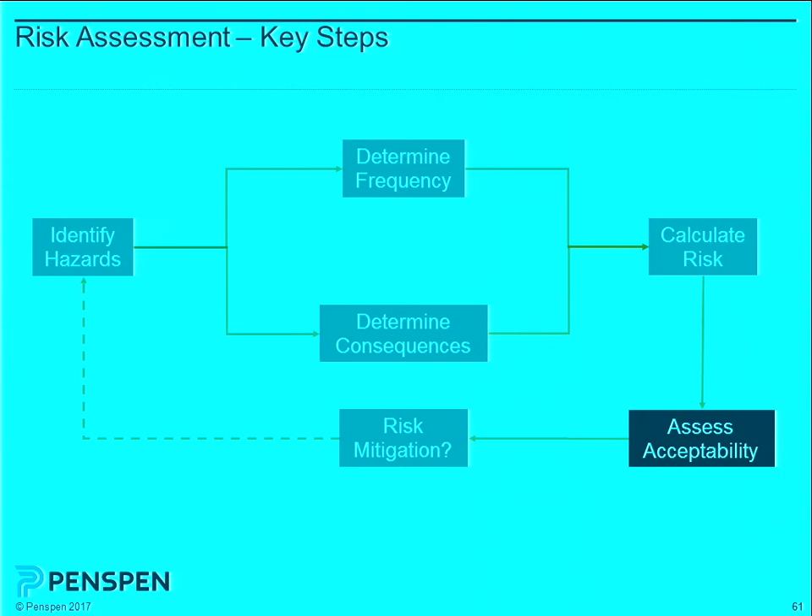Very, very rapidly through this calculation. I'm now going to finish off with what is acceptable risk. So remember, we've now finished risk analysis. Done the first job, either with the safety department or the operator or the consultant. You've done the analysis. Now it probably goes up to somebody else to say, okay, is that okay or not? So how do we assess acceptability?

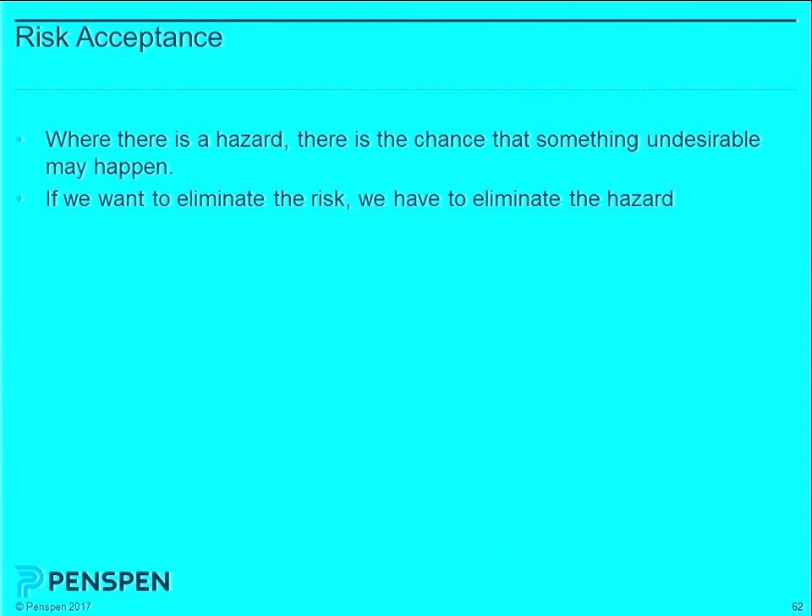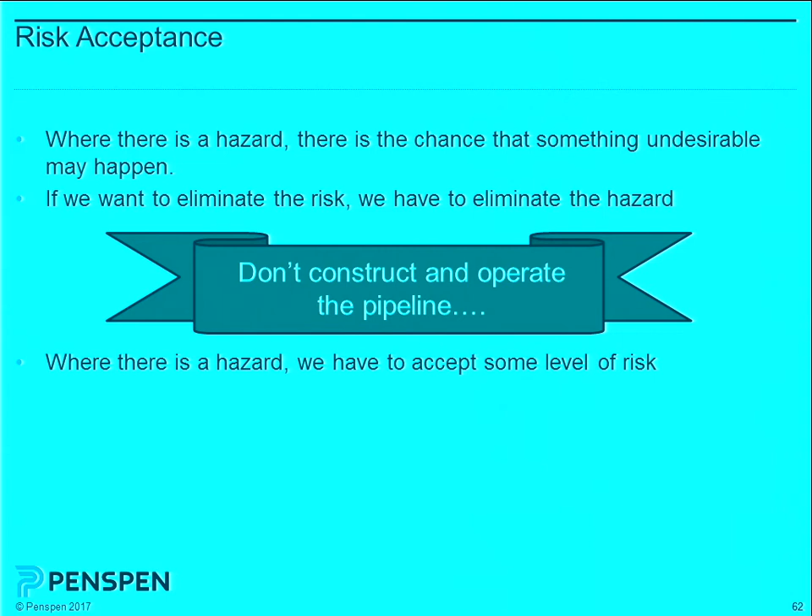This is classic safety. Where there's a hazard, it means there's a chance that something undesirable may happen. So our pipeline's a hazard. There's a chance it might go bang. So if we want to eliminate the risk, we have to eliminate the hazard. Which means, well, don't have a pipeline. Well, that's lovely, except it puts all of us here out of a job, and it turns the lights off. So basically, if there is a hazard, you have to accept some level of risk, and we have to work out how much we accept.

We know that risk is a combination of probability and consequence, so it's obvious for us to think that you will accept a low probability of occurrence where the consequence is high. So this is like society being unhappy about train and plane crashes. They don't like lots of people being killed at once, so they want that to happen less often. But when it's a car crash where it's just one at a time, they can accept it happening more often. Does that make sense? High consequence, we want it to happen less often. And if the consequence is really minor, then it doesn't matter how often it happens.

What's acceptable is also based on what we're going to gain by taking the risk, and to a certain extent, the general level of exposure to risk in a society as well. This is where it gets very political about areas of the world. Most international oil companies tend to say, we're going to use the values we use in the US and Western Europe everywhere. You may be cynical about whether they really do that, but that's what they state.

They don't think, well, it's okay because risk levels in this country are terrible, nobody makes it past 50 anyway, so it doesn't really matter. But in real life, sometimes people accept risk because they have no choice.

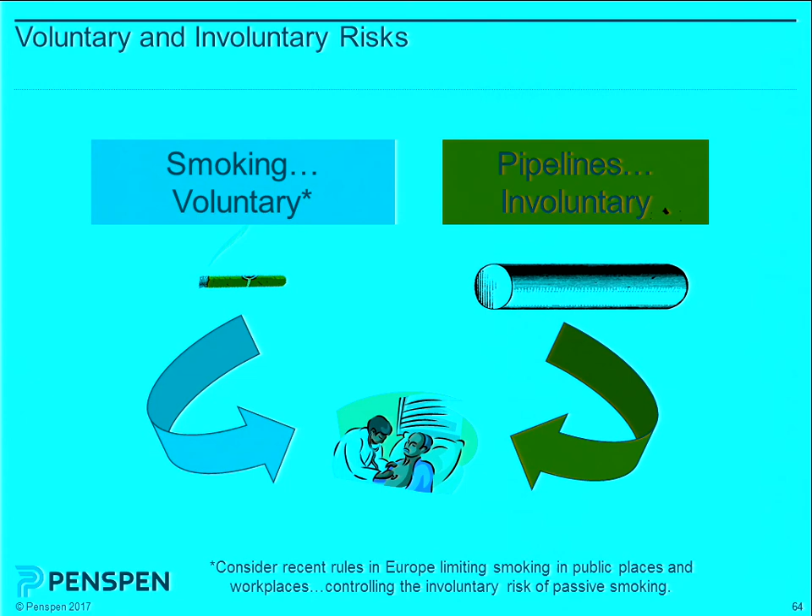So you're not allowed to do that anymore. We've said that killing yourself is okay, you can smoke outdoors, but you're not allowed to smoke indoors because you're passing that risk on to other people. So this is the general thinking: you can't impose a risk on somebody else without them choosing. So if you're taking the risk, you get to set the risk acceptance levels. So if you want to take the risk of rock climbing, that's fine. As long as you don't fall on anyone else, then it's just your risk. Yeah?

So, but we get a big problem if the people who make the gain from something that's risky aren't the people who are taking the risk. So we can have this little chart. So if you decide to smoke outdoors, you're taking the risk, you're getting the gain by looking cool for those 30 seconds while you're shivering in the wind in Newcastle. And you get to decide whether to do that or not, yeah? I mean, once you've started, you've probably got psychologically and physically addicted to it, you'll never give up. So I think you might as well just work out who you're going to leave your money to in the class now.

If it's involuntary, so if I'm the person stood next to you indoors, having to breathe in all your smoke, I'm taking the risk, but you're the one looking cool, yeah? And so what we have is the regulators on our behalf have now said that's not acceptable anymore.

And if it's societal risk, say this is like running a gas network, they're running the infrastructure, National Grid, but those pipelines go down the street, lots of old cast iron mains that are full of holes. You wander around bits of Newcastle, you'll be able to smell gas. They plan to replace every cast iron pipeline in the UK by 2032. So we've got another 15 years of them potentially going bang before it's all done.

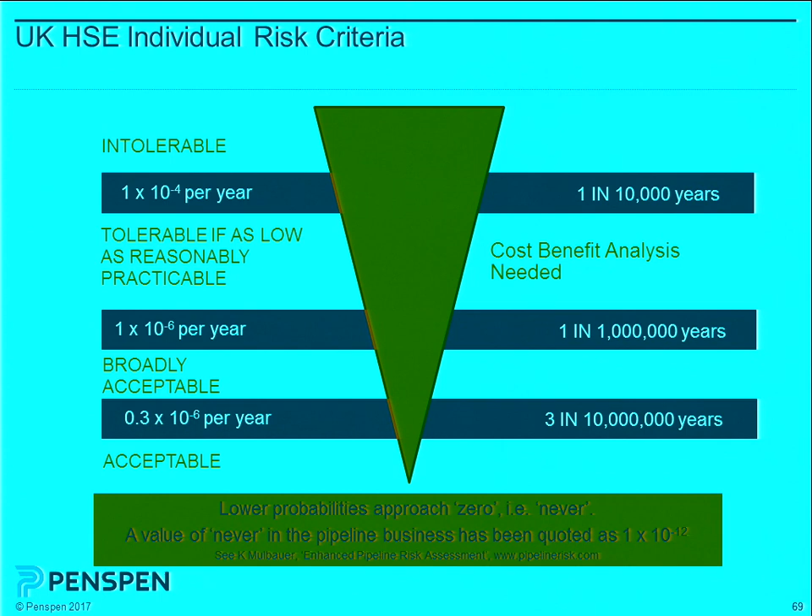And you get this kind of curve. Up here, bad, not allowed, must fix it. Down here, broadly acceptable for normal people, definitely acceptable for everyone, even the people with the bad legs. And in the middle is this cost-benefit area, we call this the tolerable area, but it's tolerable only if the risks are as low as reasonably practicable. I'm going to skip over that, it's not really too interesting here.

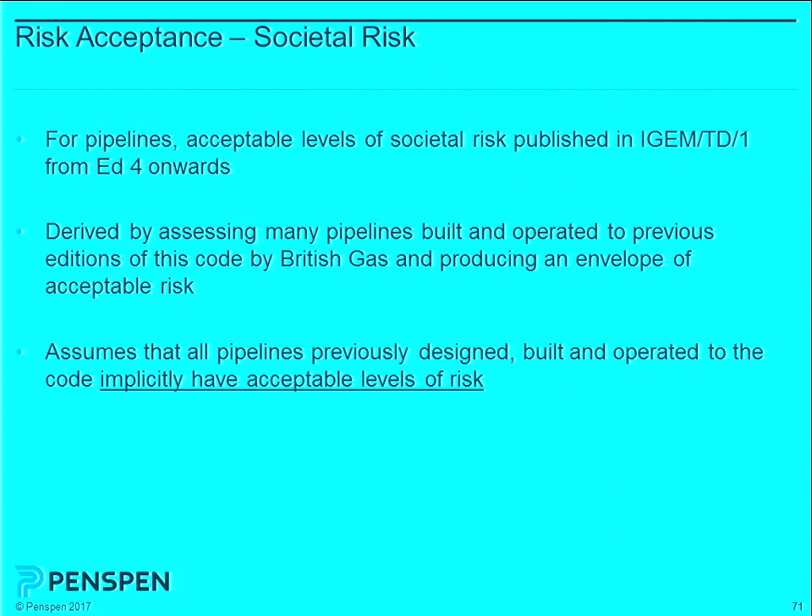For societal risk, we have acceptable levels published in TD1 from edition 4 onwards and now in TD2. This was derived by assessing all the pipelines that British Gas had built in 30 years. And at that point, they'd not managed to kill anyone with a transmission pipeline. So they said, well, that risk must be okay. And they produced an envelope of acceptable risk. And therefore it assumes that all pipelines previously designed, built, and operated to that code are implicitly acceptable. It's kind of a big jump, but you have to start from somewhere.

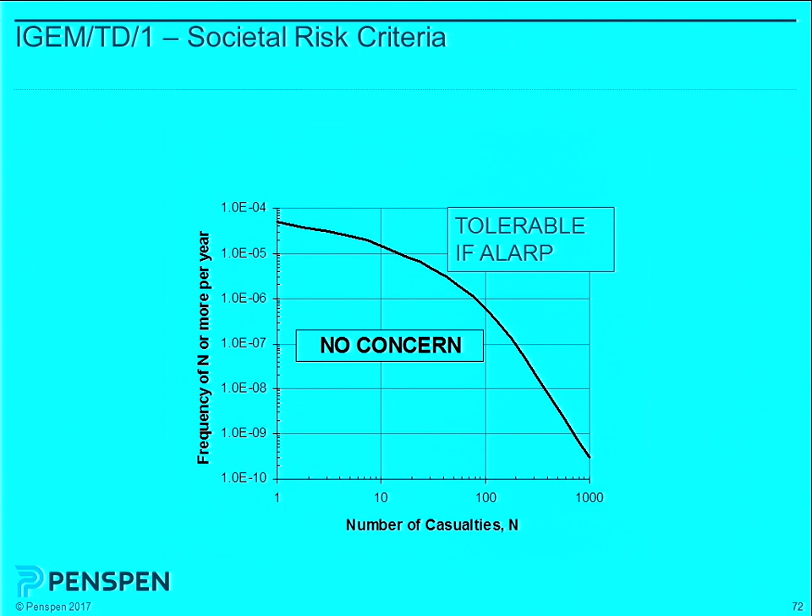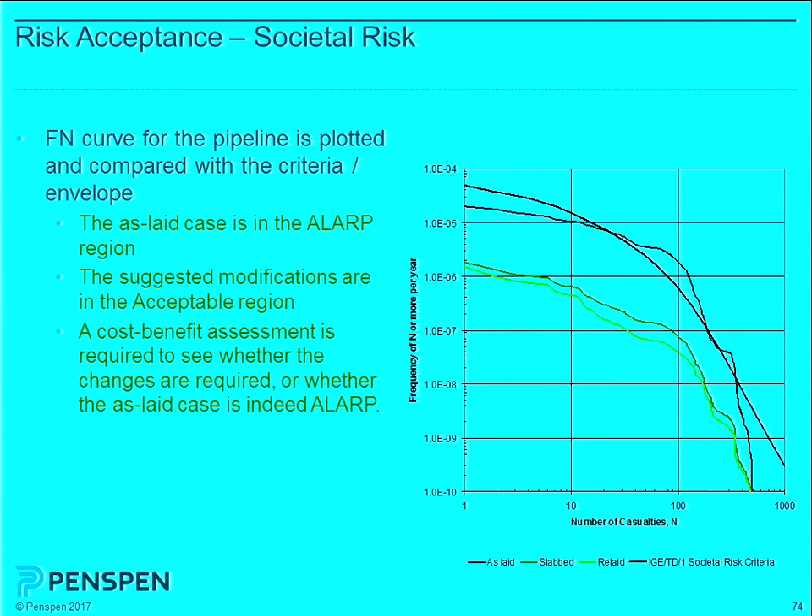So third-party damage is the key failure frequency we're interested in. Both of those will prevent or reduce third-party damage. We're getting very similar answers. And we're now inside this curve. So in that sense, we've reduced the risk. But is it worth spending the money? And that's where we do the cost-benefit analysis.

But in the UK, Netherlands, and especially in Hong Kong, you can't move anything, there's not enough space. So these countries developed criteria that allowed them to make that judgment. And the other way is you compare things with the code, which is what British Gas did. They said, okay, we built everything to the code. What does that risk give us? Okay.

There is this as low as reasonably practicable definition that comes from a court case from 1949, where a guy called Edwards was trying to sue the National Coal Board. He wanted them to put more safety equipment in his